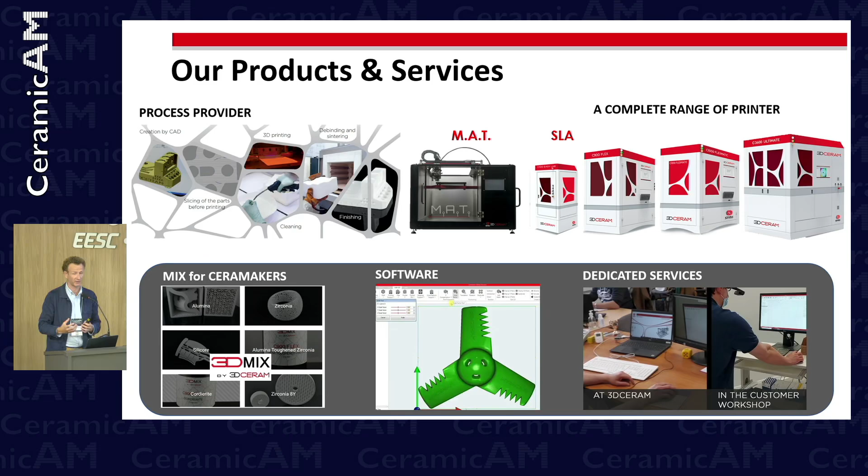Just one word about our history, because it's important for you to understand how 3D Ceram was created. So I told you in 2000, Professor Thierry Chartier developed this technology of stereolithography. Between 2000 and 2005, it was matured, but it was acquired by a technology transfer center called CTTC, Ceramic Transfer Technology Center, and they were producing parts until 2009, when our two CEOs decided to buy the patent and create 3D Ceram.

Between 2009 and 2015, we were using the printers that we developed ourselves, and our own raw material, to sell parts. So we were doing service printing for all the companies who were willing to buy our parts. We were receiving demands from universities who wanted to check the parts, dental industry, aerospace business, but also semiconductor business, luxury demands - a very wide range of applications. And I'm going to present also what are the applications and what are the markets behind additive manufacturing of technical ceramics.

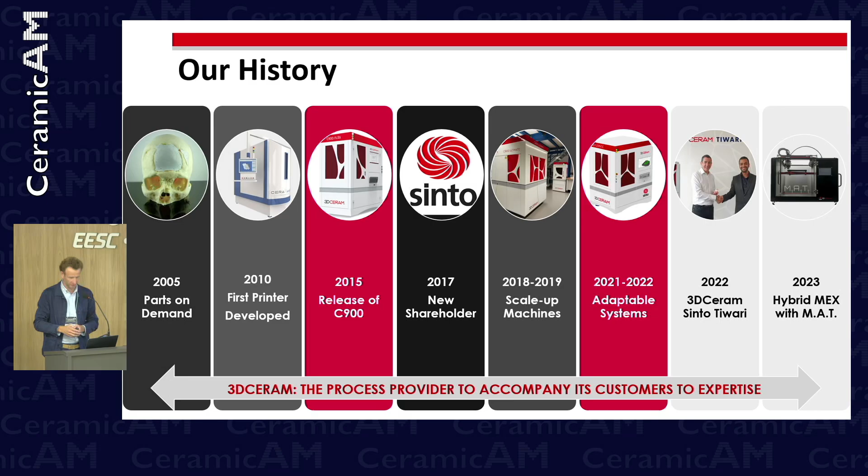And in 2022, two years ago, we bought a company called Tiwari Scientific Instruments. It's a startup company who developed the M.A.T. machine, a small desktop printer that I'm going to present in this presentation. So why is industrial scale needed?

That's important to know, and we can feel it because we have been in this market for the last 10 years, and we see more and more industrial customers coming, asking for parts or asking for equipment.

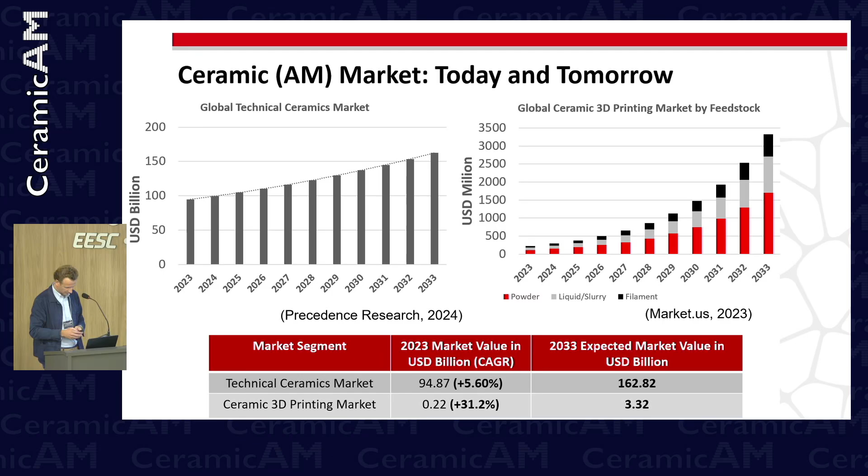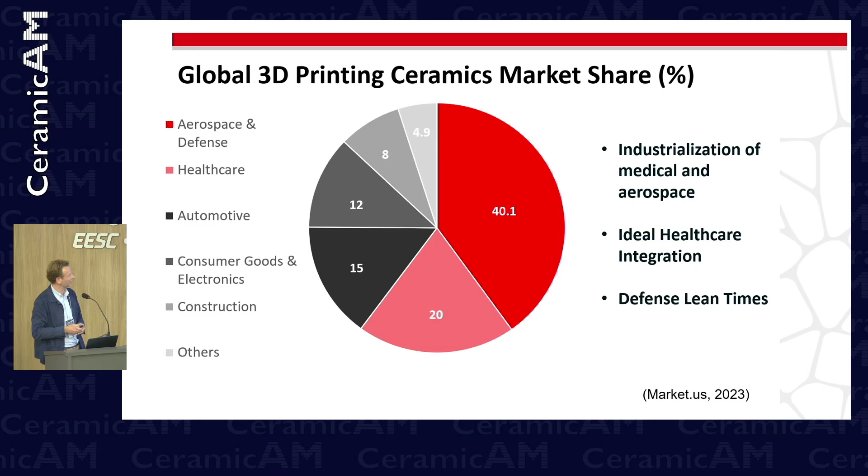Healthcare is a second interesting business sector, clearly for the biocompatibility properties of ceramic. And we see after that automotive, consumer goods and electronics, construction, but it's mainly industrial needs, and I'll explain a little more which applications ceramic additive manufacturing is interesting for.

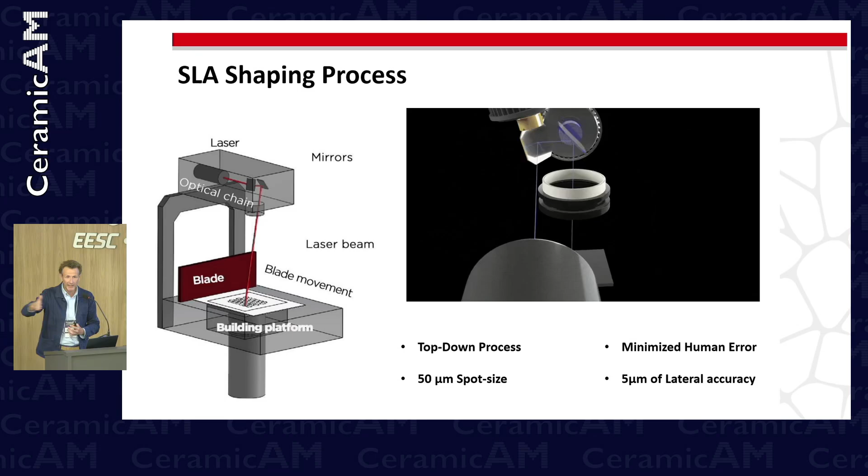At the beginning we mix ceramic powder with a photosensitive binder, which makes something liquid. This slurry is put into the printer, and the machine spreads a thin layer. For example, in alumina today we do a 50 micron layer thickness. On this layer, a UV laser polymerizes the part you want to print.

The build platform goes down 50 microns, another layer 50 microns, and again the laser polymerizes the part. So we print the part from the bottom to the top - we say it's a top-down process, okay?

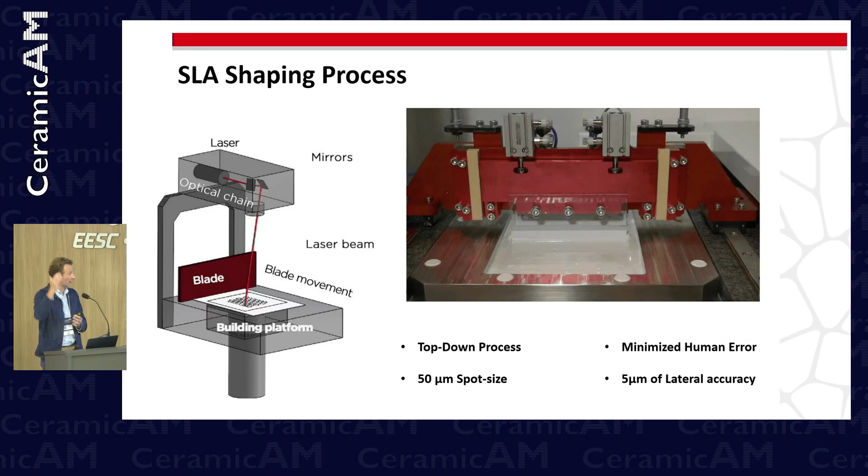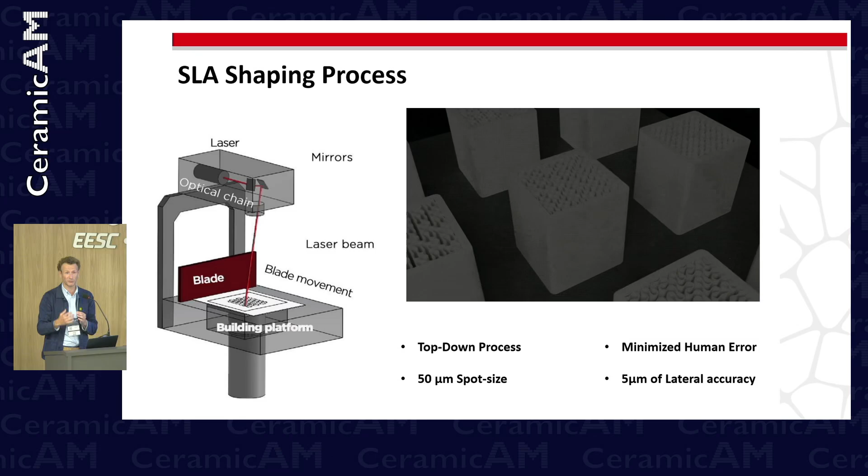It has many advantages because gravity is playing with us, so we limit the quantity of support needed, and limiting the quantity of support is very important with ceramic to reduce stress into the part, because you need to cut the support or remove it after printing or after sintering.

I'd like to focus on this machine, the smallest one we have with SLA technology. It's called C100 Easy Lab. It has a platform of 100 millimeter by 100 millimeter. That's mainly the machine we distribute and sell more for universities, institutes, research centers, or R&D departments of industrial customers who want to enter the business of ceramic additive manufacturing.

With this machine, what is interesting is, for example, you can develop your own slurry. If you want to develop a material which is not available, or test one powder, you can create your slurry and try to print it on the printer.

You have the possibility to create your own printing parameters, your own recipe on the machine, with open access to set the different printing parameters. You can also reduce the platform to 50 millimeter by 50 millimeter if you just want to do a reactivity test to check a material - with only 10 milliliters, you can do your test.

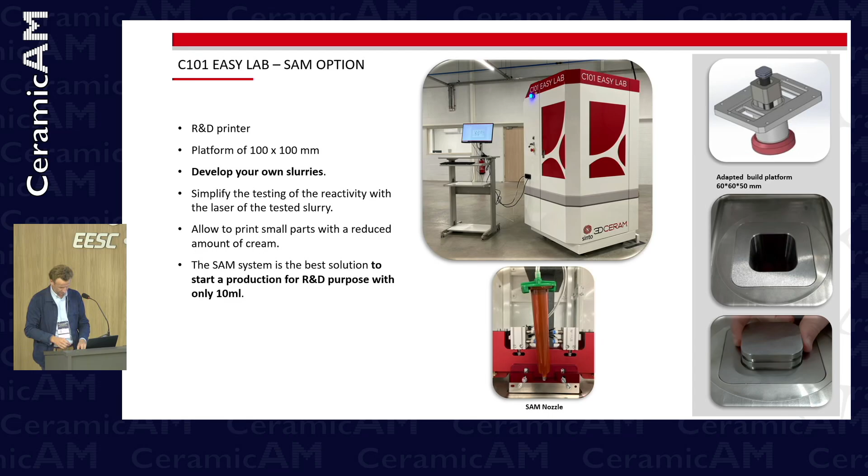Another important development we did - Professor Colombo said it's important to have multi-material possibility. So we developed a machine, we called it C101 Hybrid. It's multi-material printing, meaning we can print ceramic, but also print a second material altogether. That example of parts shows how it works.

We have on this machine 2 materials possible to print together, but we have an even bigger machine where you have the possibility to print 4 materials all together. It's good, it's nice, you have the possibility to print several materials, but printing is not really the issue, I would say. Clearly, it's how you are going to sinter and co-sinter several materials together.

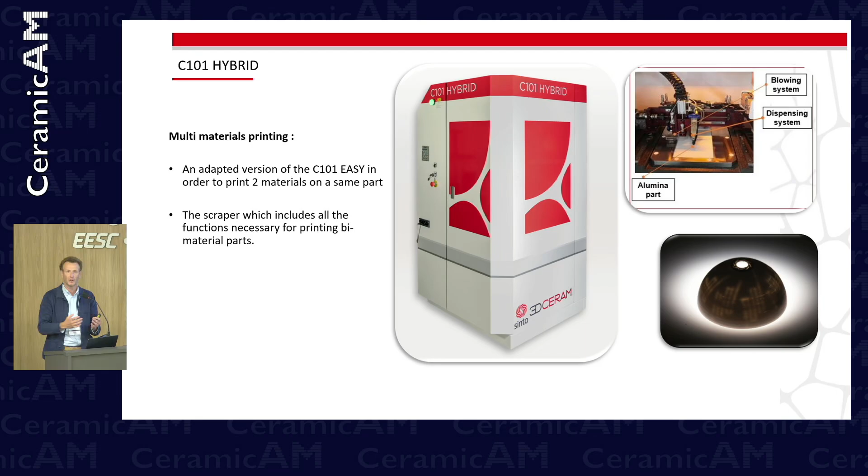So today, yes, equipment we can deliver, but we don't have at 3D Ceram the know-how to co-sinter, for example. It means our customers who bought these printers know how to co-sinter the materials they want to develop.

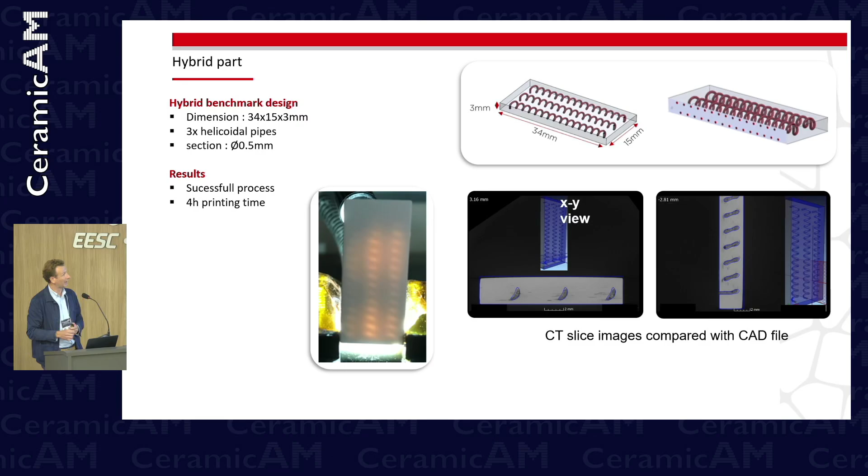That example of parts we did with sacrificial material inside. At EESC, our university in Limoges, they were able to work on HTCC and LTCC, where they managed to sinter alumina with tungsten. But it has been mostly work on how to co-sinter.

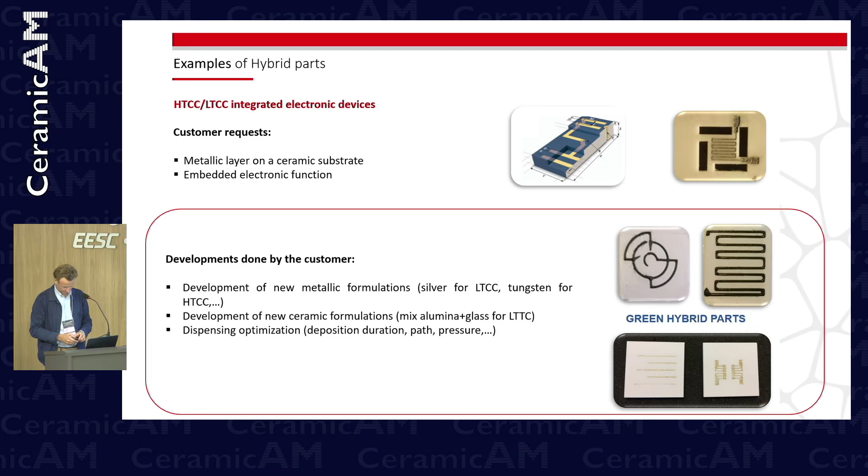Important point with SLA: the possibility to scale to bigger printing. That's interesting for industrial customers - you can develop prototypes with a small machine, but you can scale to a bigger machine.

For example, on this small machine, you have 1 laser working. On the medium machine, 320 by 320 millimeters, 2 lasers working - exactly the same laser, but 2 lasers, so you print faster. We developed an even bigger machine, 600 by 600 millimeters, with 4 lasers altogether.

It's clearly focused on production - production of big parts is possible, but also production of lots of small parts with exactly the same quality. I insist on that because it's same laser, same slurry, same consumable, and exactly the same technology with a blade to make each layer.

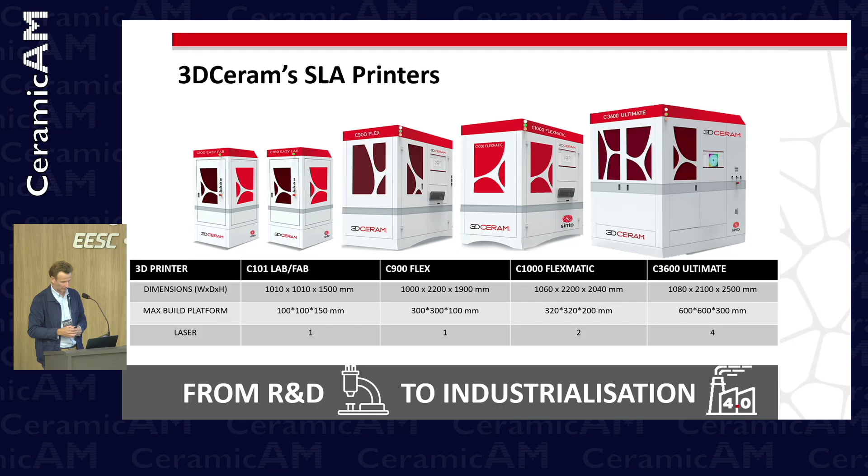Just examples of printing time: on the small machine, these small parts, 4 parts printed in 1 hour 20 minutes. On the medium machine, 48 parts in 6 hours. And on the very big one, 112 parts in 12 hours.

I have this part on the booth if you want to have a look, in alumina. So do we say mass production? No, it's not mass production, because mass production is what you do with injection molding, with pressing - there you can make millions of parts. Here, it's more customized production in high quantity, but we're not talking of millions of parts, we're talking of thousands of parts.

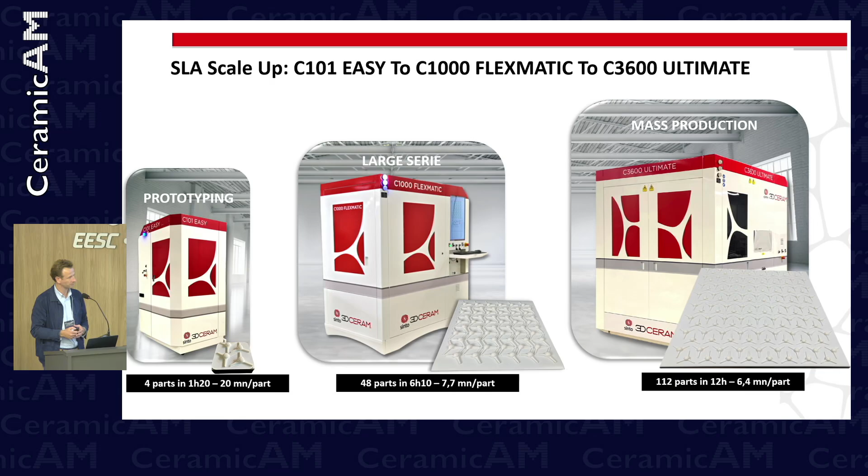So what materials are ready today with SLA on our portfolio? Oxide material, non-oxide material. In oxide, the standard ones: alumina, zirconia, silica-based material also, translucent alumina, hydroxyapatite, tricalcium phosphate, cordierite also.

And non-oxide has also been developed in the last 4 years now - aluminum nitride, silicon nitride. It's been a specific development because it's dark powder compared to oxide, and dark powder is a bit more difficult to print. You see here we do not propose silicon carbide, for example, because at the moment with SLA it's not ready.

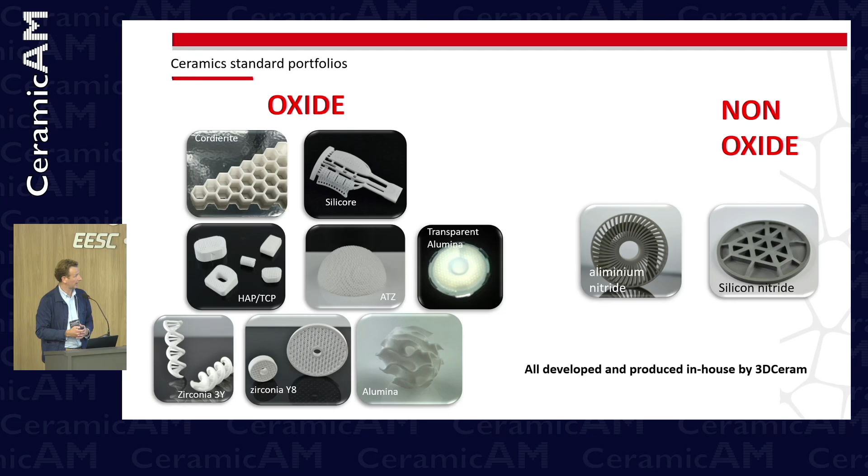What is important for universities and technical research centers is all what you can develop. And here are examples of materials developed by our customers, universities.

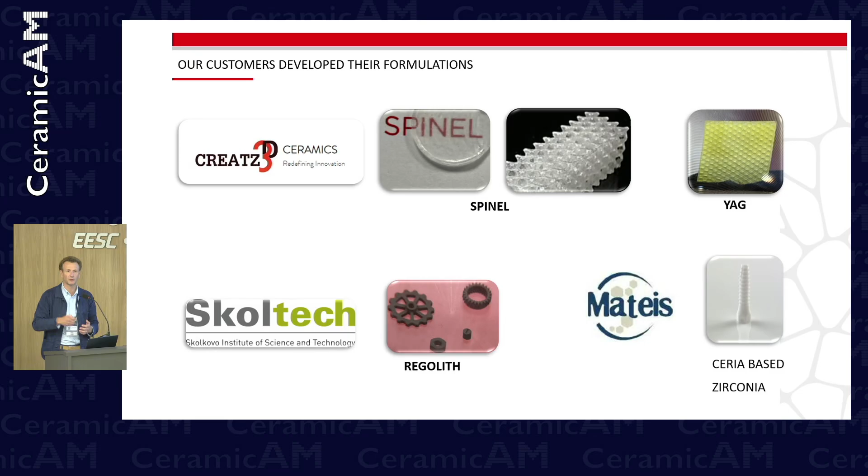Example, Creatz3D - I've been developing with a university in Singapore, Spinel and YAG. Skoltech in Russia, before the war, developed Regolith. Matéis in Lyon, France, developed zirconia doped with ceria. That's very important because we are really willing to create collaboration with universities to develop new materials.

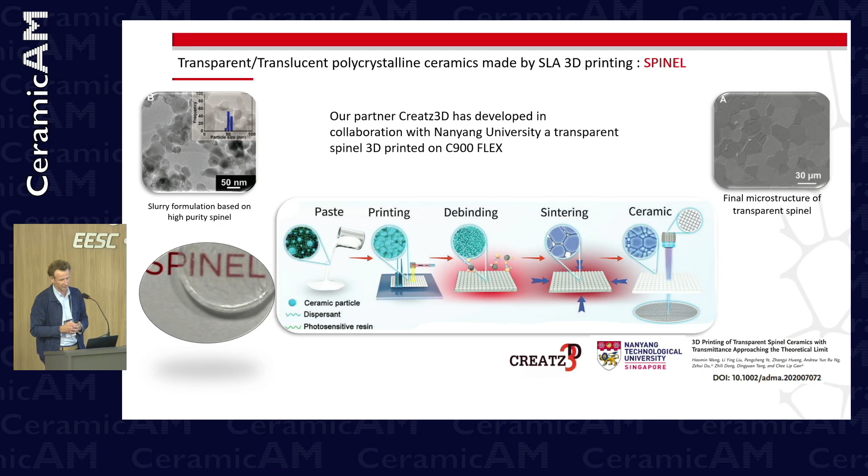So that was the Spinel developed with NTU University in Singapore - transparent ceramic, very interesting, mainly in the defense industry.

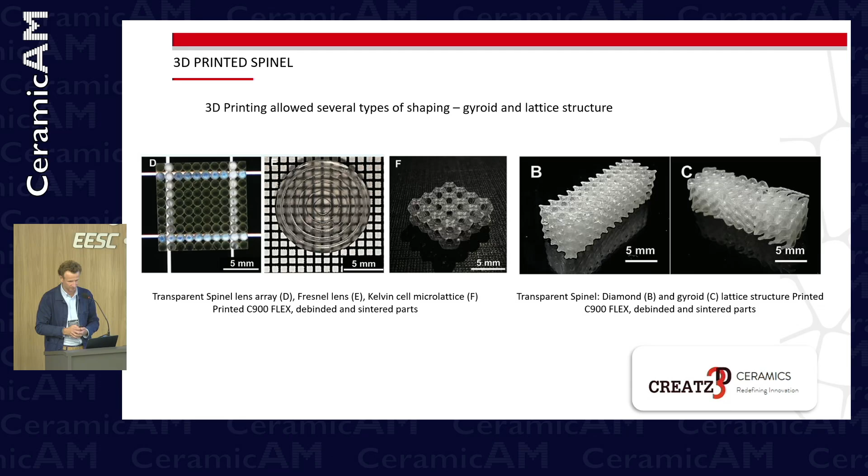We saw this morning Yttria printing. And in the dental field, Matéis worked on zirconia doped with ceria, where clearly when you add alumina particles and aluminate platelets, you improve the plasticity of the material, of zirconia.

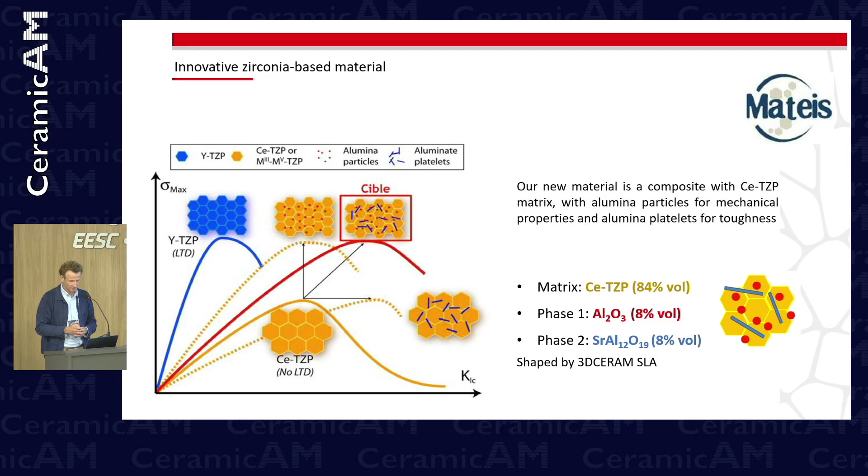I'd like to focus on applications now. It's important because all our customers are coming and asking, okay, what can I do with your printer? What are the markets behind it?

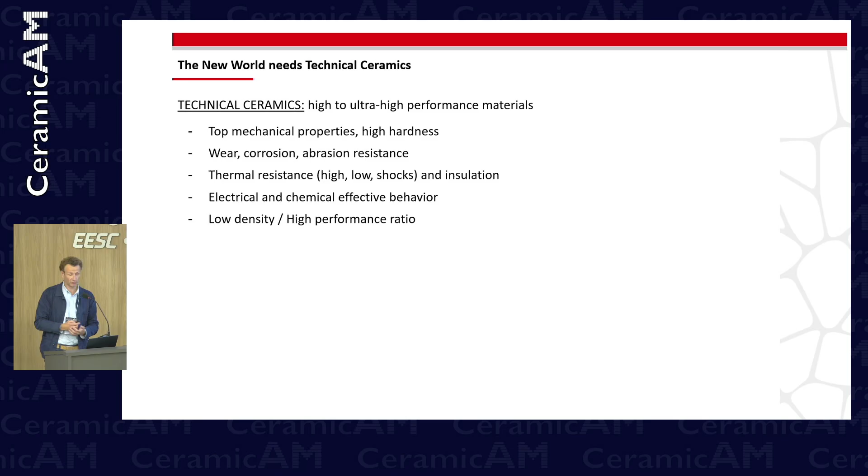New world needs technical ceramics. What do I mean? With ceramic, you have ultra high performance material - very good mechanical property, high hardness, good resistance to wear, abrasion, electrical insulation, and also low density. In the new industrial world, we have new energy, new mobility, new space, new defense, and new health. So that's clearly where we have demand.

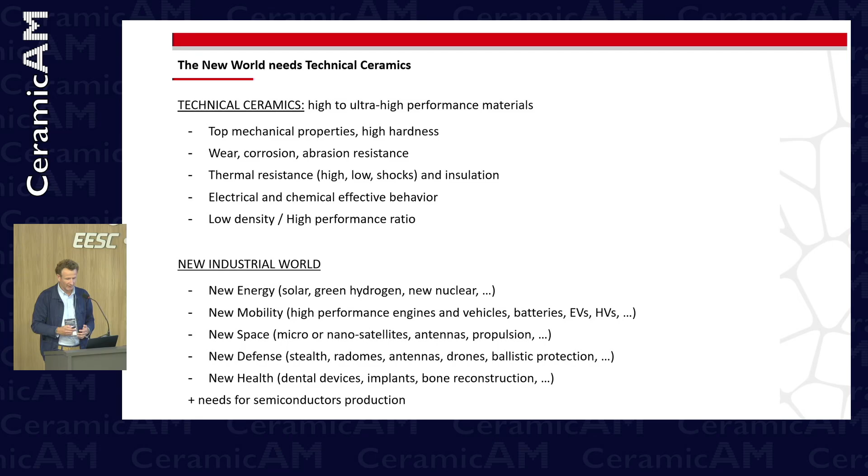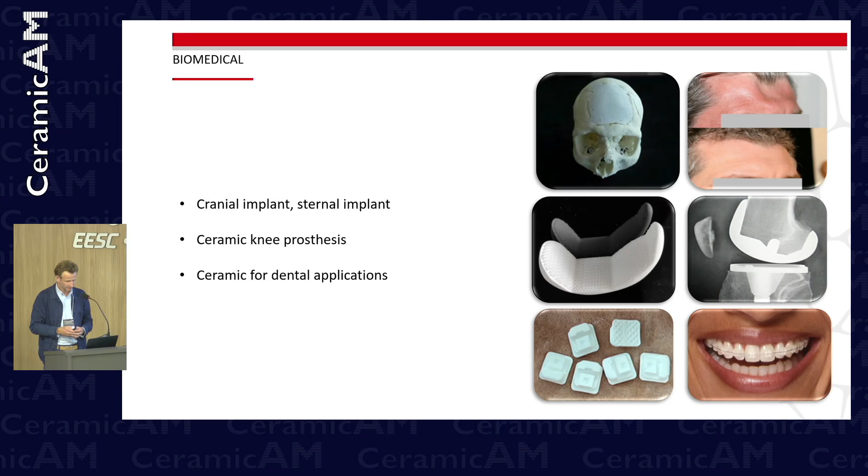But also in dental, you have zirconia implants, where you have interesting demand for biocompatibility and very good resistance. But I'd like to focus on, for example, skull implants.

Skull implant was the first success story of 3D Ceram, almost 20 years ago. We developed a partnership with Limoges Hospital, where we are based, with a surgeon who asked us to produce a customized implant for a lot of patients after surgery, trauma, or cancer. So with 3D printing, the main advantage is you can make the implants perfectly, and you can even add porosity on the border using hydroxyapatite.

With this porosity, the bone will grow into the implant, and the surgeon doesn't need to put screws to maintain the implant. So that's the main advantage.

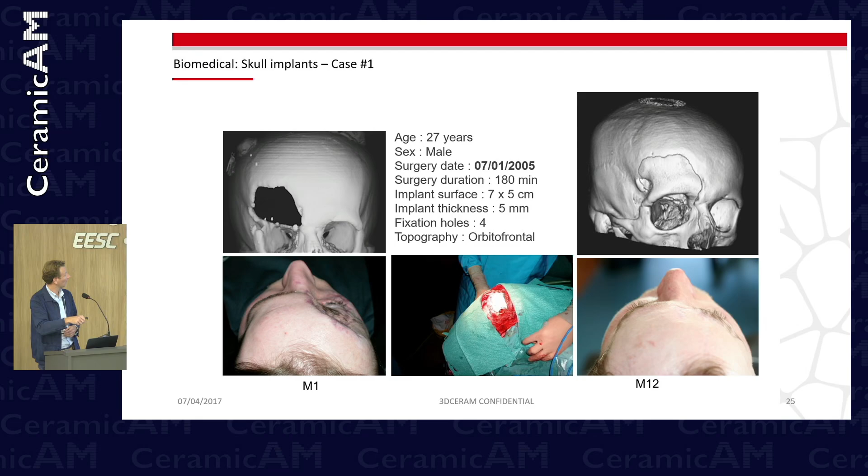So that's a real case of a young guy after an accident. It was before, during, after. And I have another example of a woman. So after 12 months, the bone had perfect osseointegration with hydroxyapatite. So that was the first success story of 3D Ceram.

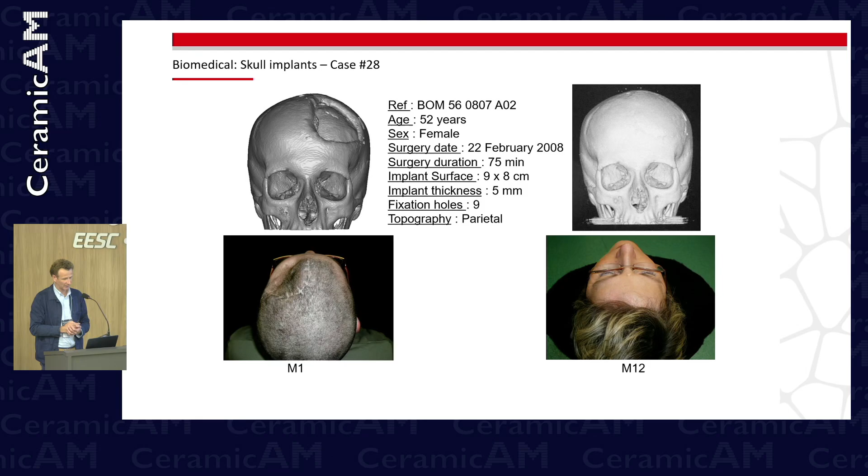I'd like to focus on aerospace now. You probably know satellites going very far from Earth, but we now have what we call new space. New space is small satellites, nanosatellites, going at low altitude in orbit, around 400 kilometers. It's smaller satellites, and it has been developed very quickly by lots of startups, and they wanted to go fast.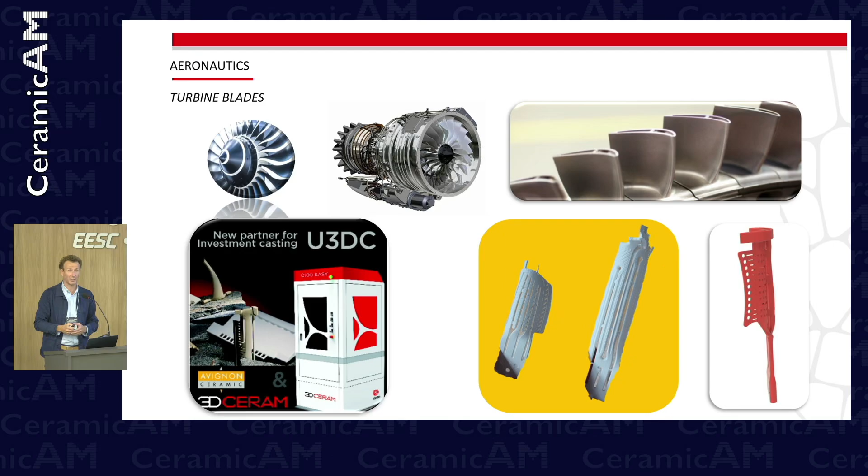A few words about energy. I'd like to share a European project where we are involved, for production of solid oxide electrolysis cells. Here it's clearly about improving production of hydrogen. Hydrogen has a bright future, but currently the cost of hydrogen is quite high compared to petrol or gas, so they are working on how to reduce the cost of hydrogen.

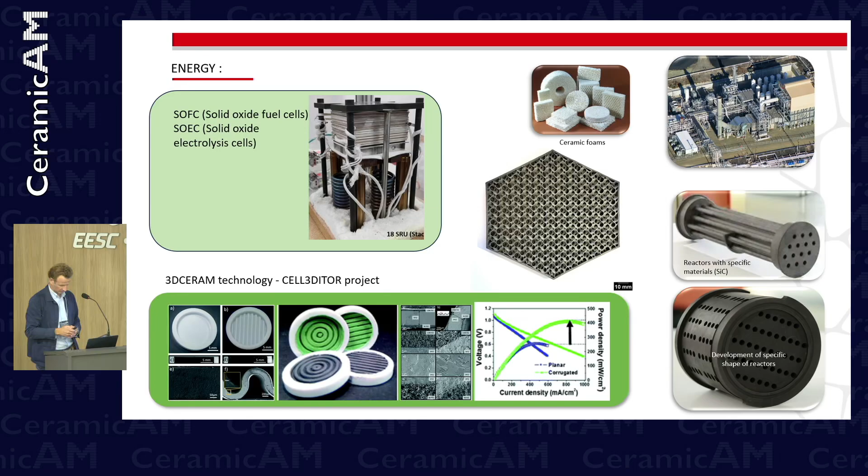To do that, they use electrolysis to produce hydrogen, and traditionally they use flat membranes in ceramic. An institute in Barcelona is working on making corrugated membranes in ceramic, with waves instead of flat, which improves the reactivity a lot and improves the quantity of hydrogen produced. So that's another example of where additive manufacturing of ceramic can be used.

That's more for women's, luxury watch industry, more for men too, but clearly we used to have lots of demand from people willing to make always more and more complex geometries. So in additive manufacturing, you can make lots of things, you have more freedom in geometry and design. But as with all technology, you have limits. Everything is not possible, so sometimes you have to explain, no, it's not possible.

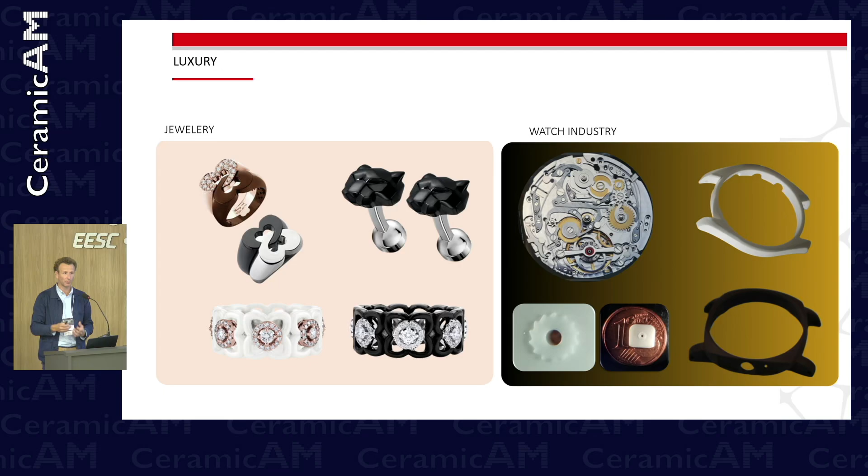Wall thickness more than 6 millimeters, you can print it, but you will have difficulty to debind correctly and burn off all the binder. So that's one of the important limits of the technology. And of course, you have to control the shrinkage during sintering, around 20%, not exactly the same in the 3 directions. So that's all this know-how that we transfer to our customers who are investing in our technology.

Defense companies have many applications with ceramics. Semiconductor business is interesting too because they're also willing to have big parts. I'm showing one of the big parts on my booth, but they need a very complex geometry with internal channels and very good accuracy, and that's possible with SLA technology.

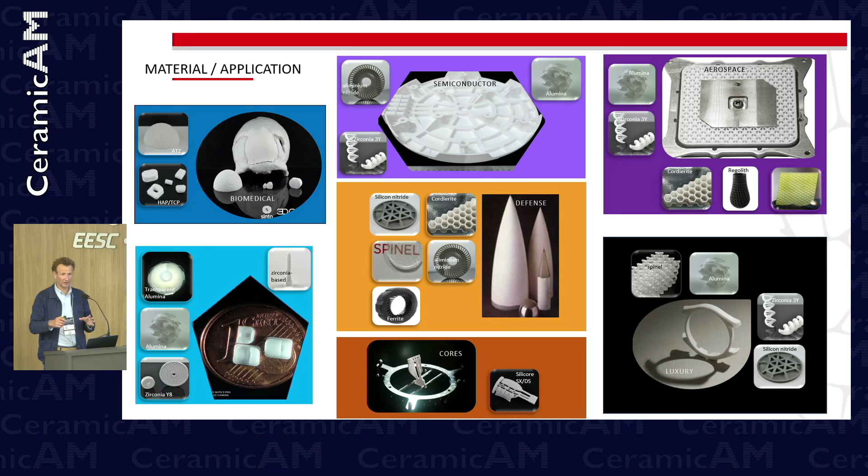So that was on the SLA side. Let's focus now on MAT, a completely different technology. MAT means multi-additive technologies. As you can see, it's a smaller printer, a desktop printer based on extrusion. The main advantage of this smaller machine is of course a cheaper price.

You have the possibility to have several extrusion technologies in the same printer. So you have FFF, filament. You can put a pellet head into the machine, very interesting for people doing injection molding, because that's the same pellet used for injection molding. We can print it too, and pellet cost is very low compared to filament. There's also robocasting or direct ink writing. And the main innovation is that we add in the same printer the possibility to do machining, CNC.

We all know that with extrusion, you always see the layers. That's a problem sometimes. So with CNC in the same machine, you print, and you have the possibility to improve the surface roughness or improve the dimensional tolerance of each part, at the green stage, not sintered.

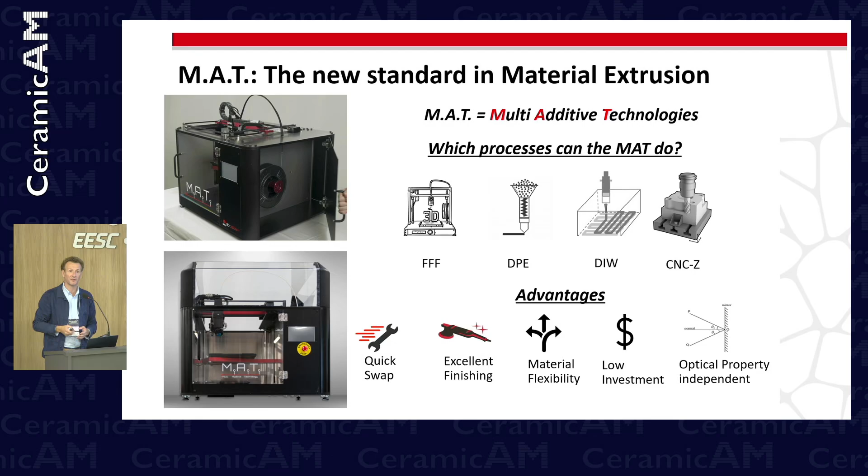So that's the materials available: alumina, zirconia, silicon carbide. But you also have the possibility to print titanium, stainless steel, or copper.

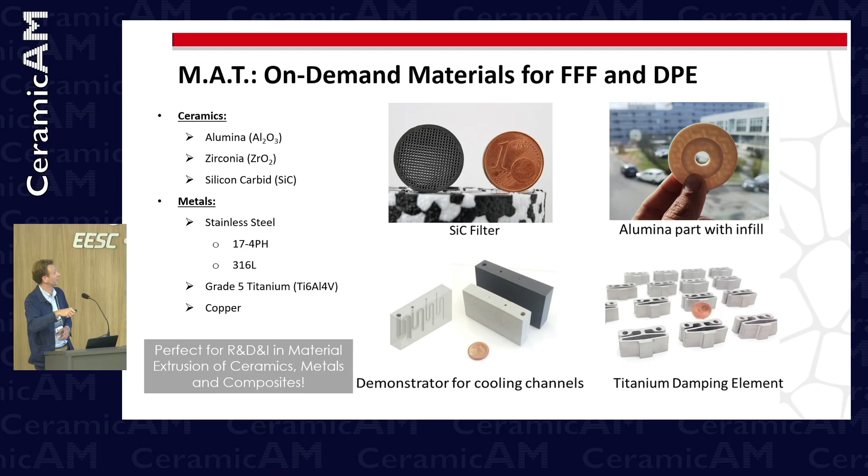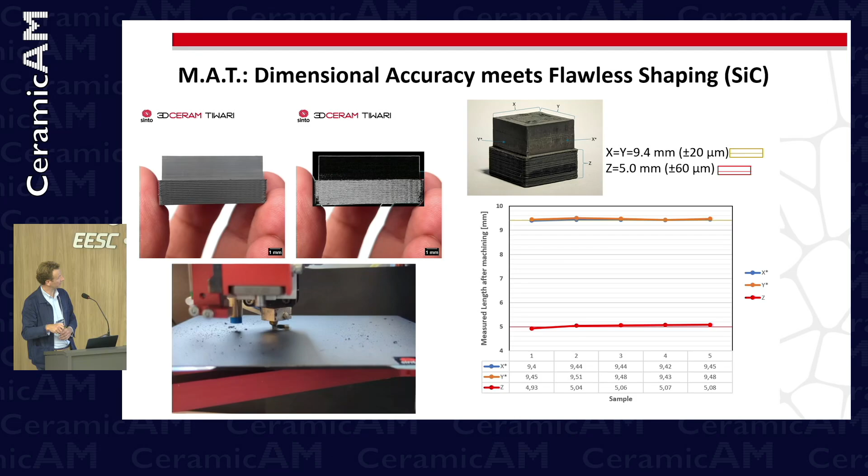I have a short video showing printing and afterwards machining. That's interesting to see also the tolerances we could get after machining. You see the difference here without machining, and here after machining.

Example of silicon carbide parts. My colleagues in Berlin, Tiwari, have been developing this silicon carbide material in collaboration with ESA, the European Space Agency. Silicon carbide is really known and famous for aerospace properties, and we obtain a density close to 97%, which is quite good.

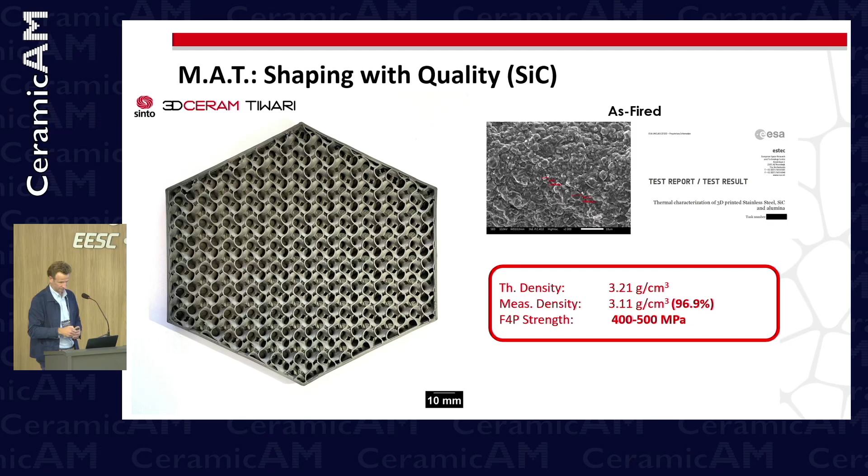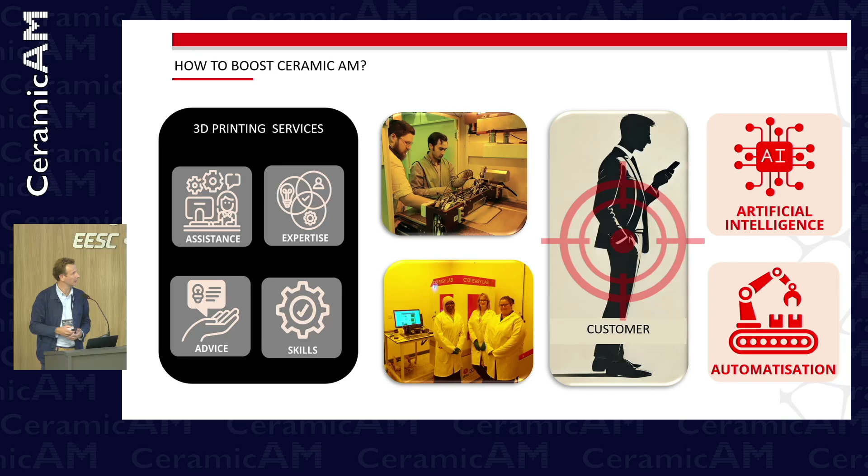To conclude, we have developed the machine, we have expertise, we have training and advice, but what a customer needs now to switch to industrial production, we think, is clearly automatization and machine learning for the next 10 years. We are working on automatization.

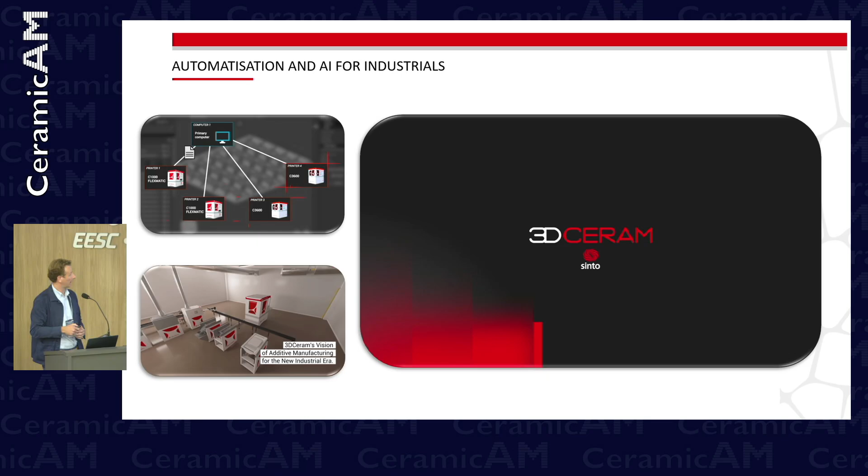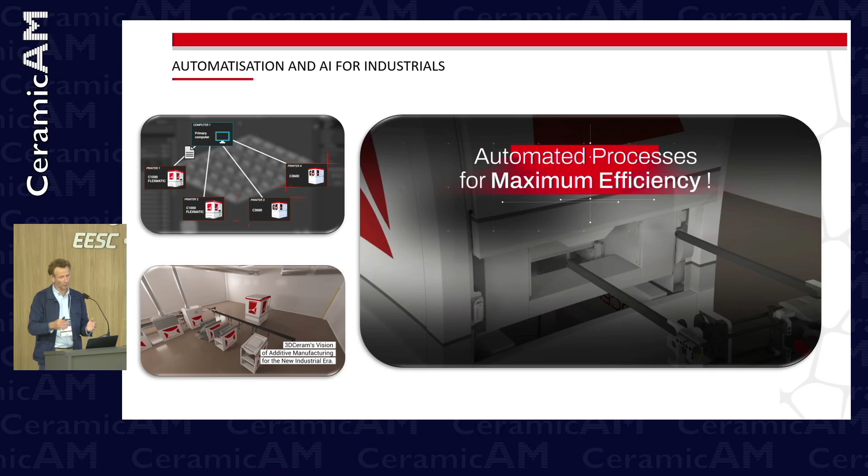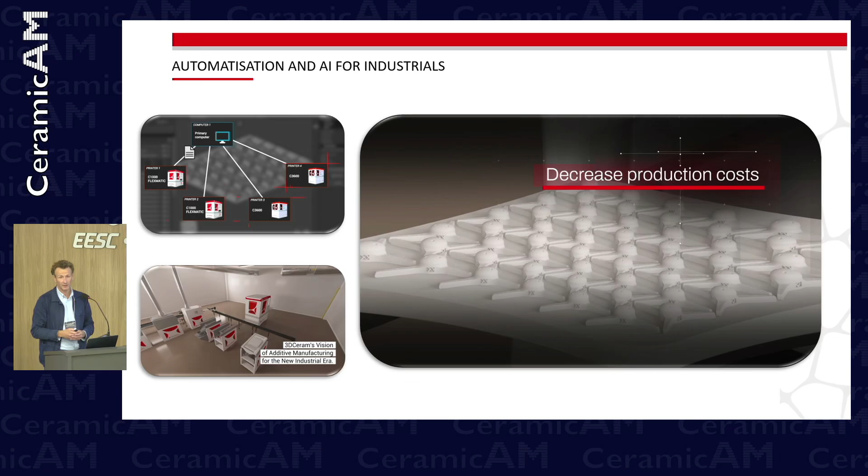With SLA, you have the possibility to do automatization, of course for printing, but also for cleaning, even debinding and sintering. There's a short movie where we are working on an automatic machine for cleaning, for example, also a robot putting the part in the debinding furnace and immediately after debinding, again sintering. So clearly the objective is to decrease the cost per part. That's an issue we have. It's true that today we need to find markets with high value parts.

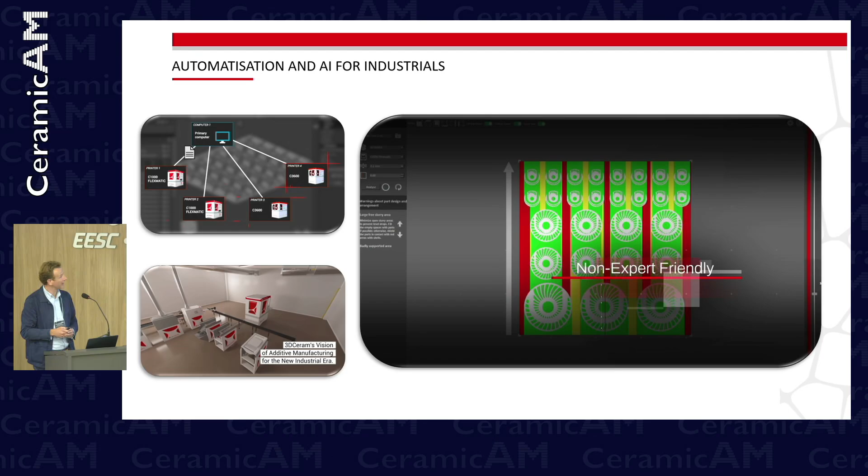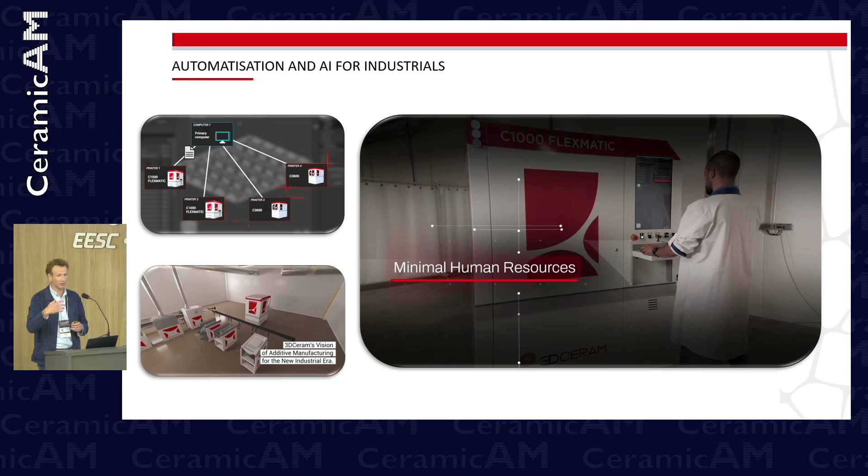We're also convinced that we need to integrate artificial intelligence into our industrial printers. So we are now launching new software able to support and help the customer: you put your platform in the software and it will tell you that you need to add more parts to the printing platform, or remove parts, or that the support is not right and you should support it differently. This is the key point to help our industrial customers in the coming years.

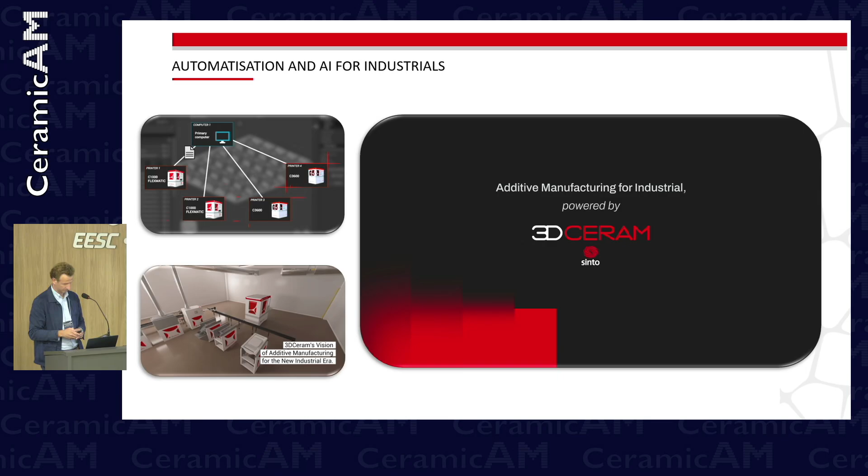So productivity and repeatability are very important when you evaluate technologies. You need to evaluate suppliers, of course, their financial solidity for the next 10 years is important, and how they support you. Do we have local partners to support very quickly? That's a key point to have confidence and obtain good results with the technology.

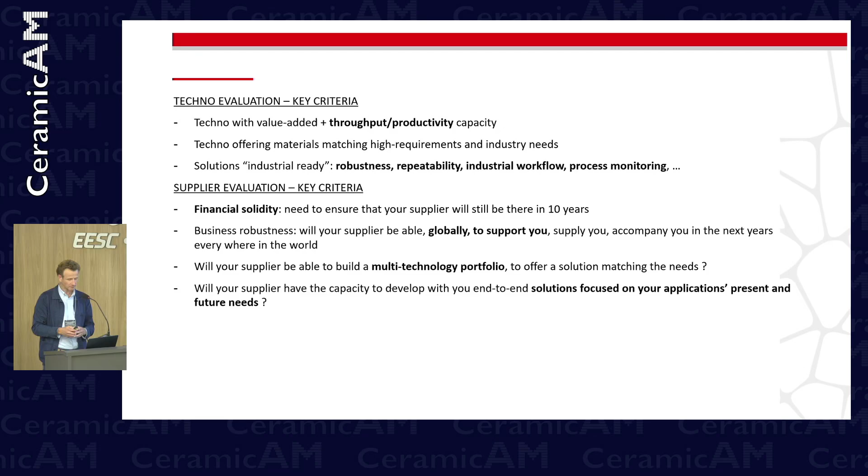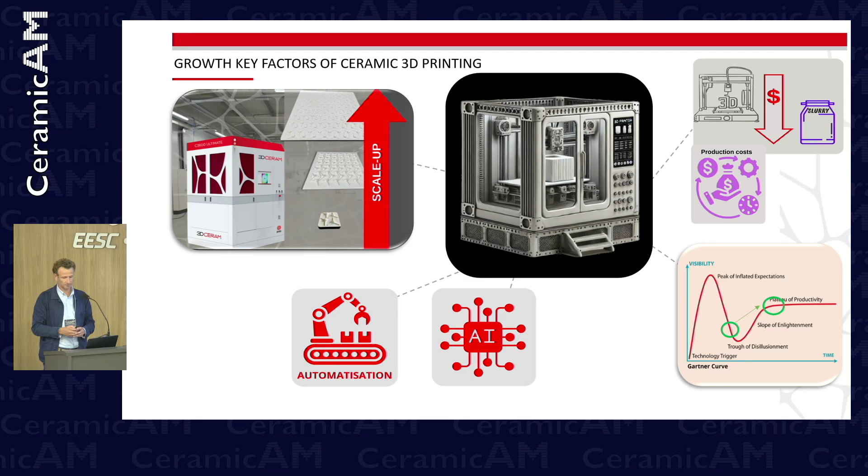So the objective for us is scale, to scale industrial printers, lower the cost per part, obtain good repeatability, automatization to reduce the cost per part and also reduce human work in the process. That's what we believe for the future. I think that's the last slide. Muito obrigado, and if you have questions, do not hesitate.